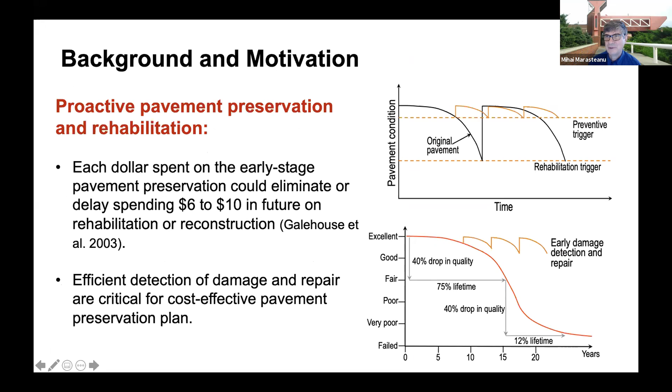And indeed, the background and motivation is very straightforward. Everybody knows about proactive pavement preservation and rehabilitation versus reactive. This has been a topic that has been discussed for many, many years in the pavement community. And basically, it boils down to the fact that if you can actually manage to keep the pavement in a reasonable condition, starting with the early stages of pavement preservation, then we can eliminate very costly repairs that are needed if the pavement is not preserved in time, so to speak.

So these numbers have been around for a long time. A lot of people are talking about pavement preservation, but in terms of practical applications, although there is a lot of work, it's fair to say not enough has been done. And an efficient detection of damage. So when we talk about early stage, what does that mean? Early detection of damage is not always possible. That is a critical component, and a timely repair also is a critical component of a cost-effective pavement preservation

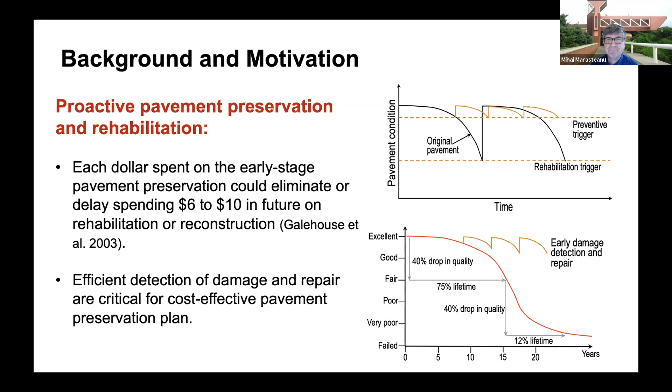And our focus was, as we mentioned, on early detection, to find out when we start to see, for example, microcracks occurring and other types of damage. We show here a number of pictures from various non-destructive test methods that have been used. Of course, we are all familiar with destructive test methods that could be more accurate, but, as we well know, result in a bunch of round holes in your pavement when we take cores.

But I would say for the past 20 years, there has been a lot of work in non-destructive testing. There are more and more technologies available, computational capabilities. We are showing here some of them. And I have to acknowledge that some of the methods shown here, for example, MIRA, and in particular the rolling density meter, came out of research and sponsorship from Minnesota Department of Transportation, which has been a champion in promoting some of these non-destructive test methods.

Of course, there are other methods, digital image correlation, and the ultrasonic test, in various forms that have been used. But as you will see in this investigation, we were trying to take advantage of some unique properties of the new materials to be able to detect this early damage.

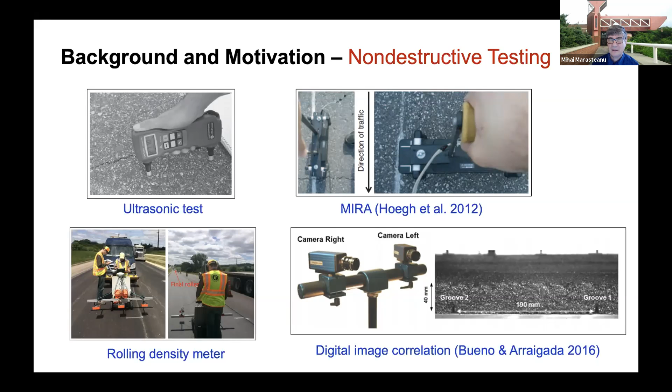Okay, so Jialiang, if you would like to continue, thank you.

Thank you, Mihai. So as Mihai said, over the years different NDT methods were developed. In this research, we take a different route. We were thinking whether or not we can use the pavement itself as a material to detect damage. In the literature, some people call it self-sensing. The material we have investigated for a while is called GNP-modified asphalt materials, and GNP stands for graphite nanoplatelet. So I just want to give you a brief description of what this material is.

So GNP, basically, is like a disc. The disc consists of several layers of carbon atoms, which we call graphene. The disc has a thickness of about submicrons, and the diameter of the disc is about several microns. So it's really small. When we receive the materials, it's basically like a powder. Starting about 2015 or 2016, the team at the U of M has tried to develop this GNP-modified asphalt material, and we looked at different properties of the material, mostly mechanical properties.

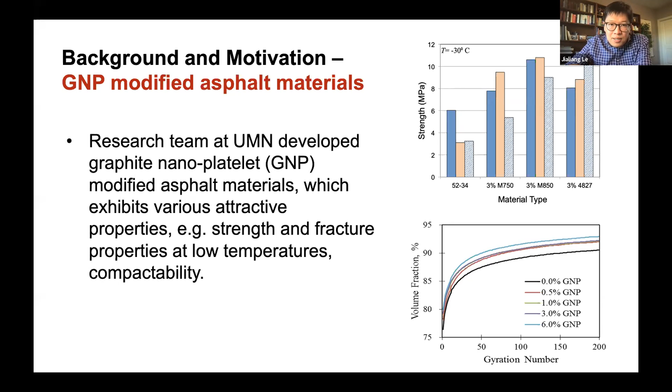Now, we also observe that during the previous research, we see that the GNP material is also highly microwave absorbing and also conductive. So if you do not add the GNP, you may imagine that the asphalt material does not conduct electricity, but after adding GNP, it does.

At the same time, if we put a GNP asphalt into the microwave, you will see what happens. I hope the video will play here. So you can see now something happened. So what you see is that we put a small amount of GNP asphalt in the microwave, and through microwave energy, actually it can generate a lot of heat. And that really stimulates the idea to see whether we can use that to do damage healing.

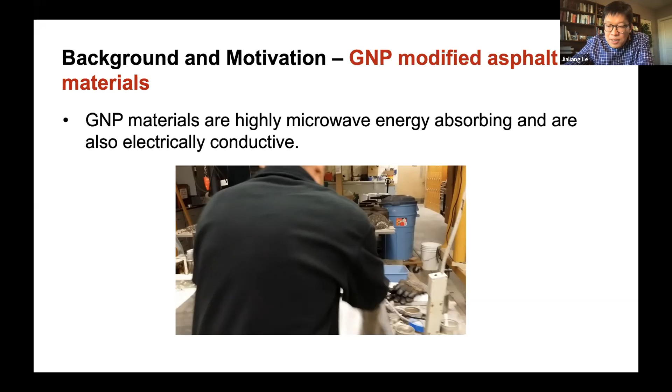Okay, so that is a very brief background of the GNP material developed at the U of M. And now I want to hand over to Larry to talk about the other part of the material with the Taconite Concentrate. Larry, please.

Sure, thank you. Yeah, and thanks everybody for being here today. I want to thank Jialiang and Mihai for having me along on this project.

It's been very interesting. Really, the background and motivation: Jialiang has just talked about GNP, and so has Mihai. A lot of research that we've done over the years. I have to give credit. I know that Dave Hopstock is in the audience today, and also Kyle Hoegh, who are both collaborators on this project.

David brought to my attention several years ago how magnetite is an excellent microwave absorber, and we have a lot of magnetite in the taconite ore that's mined here in Minnesota, and a lot of byproducts that are generated that I've talked about over the years as being a very good aggregate material. This property is inherently enhanced with magnetite, so it makes it a natural choice to use in a pavement application like this.

So this is just a very quick example of what that effect is, comparing limestone, sand, quartz, which is basically transparent to microwave energy, versus the three taconite materials on the right, going from left to right with increasing magnetite content. So you can see just over a period of 30 seconds, the difference between each one. So there is a definite heating enhancement with using taconite materials that contain magnetite in asphalt formulation. So next slide, please.

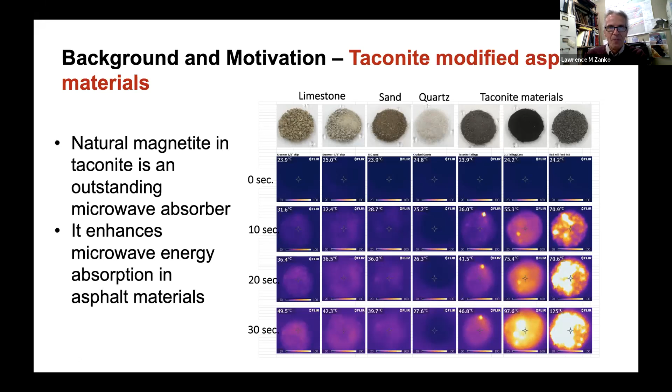And just taking that a bit further, we received cubes that were made at the University of Minnesota Twin Cities campus that contained a control binder, taconite concentrate only, and GNP plus taconite concentrate binder. So again, these are some experiments that were done with a 1 kilowatt customized microwave heating device that we use, and then some thermal imaging to give you an idea of what was happening.

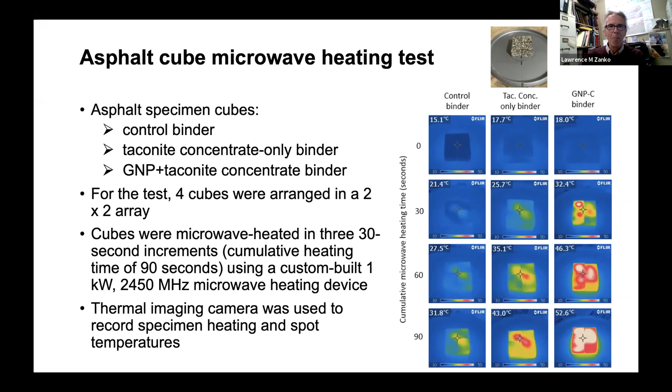Again, the control binder in the left-hand column, just binder as is, taconite concentrate only in the middle, and then the two together. And this is something that we saw during this project and other experiments, that there seemed to be a synergistic relationship between having GNP and the taconite concentrate together in a mix. So that again is more of the rationale for the project, using these two in combination for ultimately rehealing or enhancing the strength and long-term durability of asphalt pavements. So I think that might be it for my part right now. Yep.

Yes, so I want to just summarize the objective of this research. This research really looks at 4 aspects of this new material and tries to explore its capability for 2 things. One is damage detection, one is damage healing, which very much align with the ultimate goal of earlier detection of damage and pavement preservation. So we will talk about damage detection through the measurement of electric conductivity.

And then we want to talk about whether or not the GNP-taconite-modified asphalt materials will indeed improve the conductivity. And then we will talk about the damage healing capability of this new material through microwave heating. And then we will present some application of this new material for tack coat.

So the first topic I want to talk about is damage detection using electric conductivity. This part is theoretical modeling. Basically, we are asking ourselves: if we have an electrically conductive material and a crack forms in the material, are we able to quantify the extent of the crack through the measurement of conductivity?

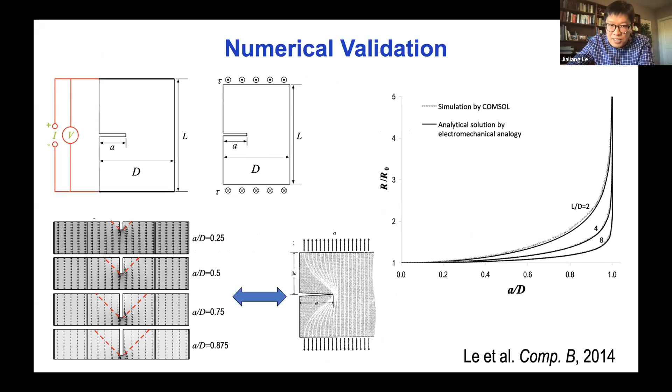So it shows that this model really works very well, provided the material is conductive. So theoretically speaking, if we have a conductive material, we are able to determine the crack size precisely from the measured change of the resistance. So the next question is whether we are able to make a conductive material. That leads to the second part of the talk, which will be focused on the electrical conductivity of GNP-taconite-modified asphalt materials. So now we want to see whether, if we add GNP and taconite into the asphalt, we can make it conductive.

The GNP material we investigate in this project is from Asbury Carbon, a company in New Jersey. They provide us two types of GNP material. One is called M850, which is a graphite flake. Carbon content is 99.54%. Surface area is 13 meters squared per gram. The other one is 4827. This is what they call a kinetic graphene material. It has a higher carbon content, 99.66%. Surface area is much larger; we are looking at 250 meters squared per gram.

The reason that the company provides us with these two materials is cost. The company is aware of the potential application of large quantities for infrastructure, so it's important to keep the cost low. As you can see, the cost of these two materials is pretty low. We are looking at $3 to $4 per pound. Just to give you a brief idea, if you purchase single-walled carbon nanotubes, we are looking at $20 to $50 per gram. So it's much more expensive. So we try to use a cheap material that can serve the purpose.

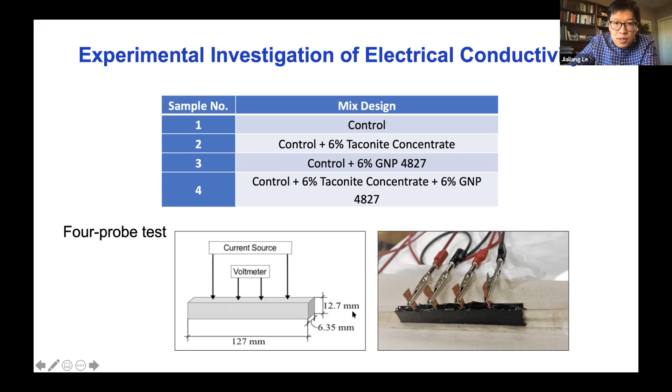And on the right-hand side, you see the specimen. So the outer 2 outlets are for the applied current, and on the inner ones, we measure the voltage. And there's the specimen dimension. Okay, so quickly, that is the result we measured. We measure conductivity.

And on the other hand, if you just put the GNP or taconite by itself, it does not lead to much increase in conductivity. So we speculate what's the reason behind this. It's not fully understood yet, but our speculation is that, for example, if we put GNP in the binder, how can we make the binder conductive? So GNP itself is electroconductive, okay?

Now you put those small particles and disperse them in the binder medium. So you want those particles to be as close to each other as possible, so the electrons can hop between them. And to do that, you want to create almost a uniform network of GNP. That is extremely difficult to achieve in experiment, because the binder is viscous, so it's very hard to uniformly disperse GNP in the binder, even though we use a high shear mixer. We still cannot really achieve the optimum uniform network of GNP.

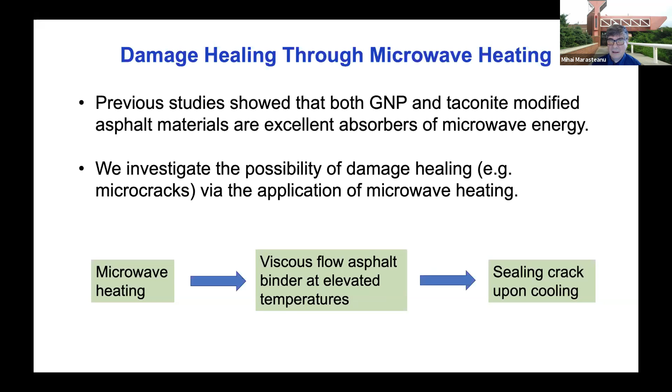And there were a number of studies in the literature that showed the potential of healing. I remember 10 years ago, Delft University was using steel fibers. They had a beam, they cracked it, they put it in the microwave, and then they retested it, and it showed that the beam could still take some loading. So it was more of an empirical approach, but we wanted to follow a more rigorous approach based on fracture mechanics concepts.

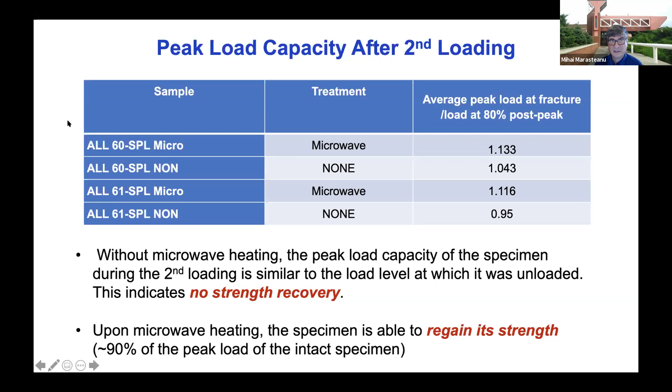And you can see from these values that without microwave heating, the peak load capacity of the specimen during the second loading is similar to the load level at which it was unloaded, which indicates no strength recovery. So obviously, this is where damage occurred. However, upon microwave heating, the specimen was able to regain its strength, approximately 90%, a little bit more, of the peak load of the intact specimen. So clearly a significant difference. And I think this is more obvious in the second slide.

And I have to mention that from what we have seen in the literature, this is the first rigorous test based on mechanics concepts that shows that healing actually occurs physically in a specimen in the lab.

So, all right. So I think now Larry will discuss the various microwave systems. He's the expert. I mean, Vern is the expert, but Larry will do some presentation now. So thank you, Larry. Okay, thanks, Mihai. Yeah, Vern is definitely the expert, and Dave is as well.

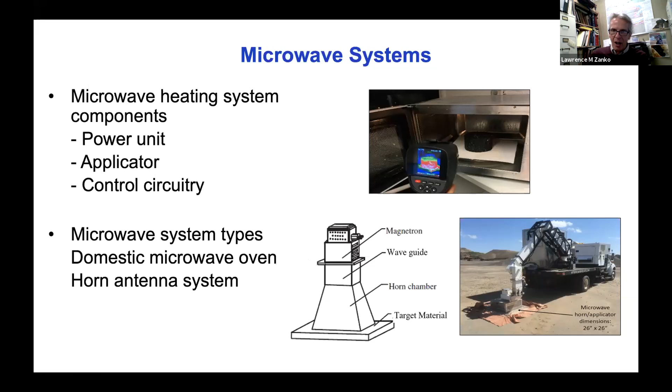And the piece of equipment on the lower right is something that we did a field test on a couple of years ago at Tiller Corporation down in the Twin Cities. Kyle Hoegh provided the equipment. I believe we were using a 50 kW generator and did some tests. So next slide, please.

Yeah, the idea here, Tiller had an area where they generate a lot of aggregate. They had 3 different pavement types that we could test. One was granite, one was a limestone asphalt mix, and another that was Mesabi aggregate, or basically crushed taconite waste rock, which they put down in an adjacent portion of this area. So we were able to test all 3. So next slide, please.

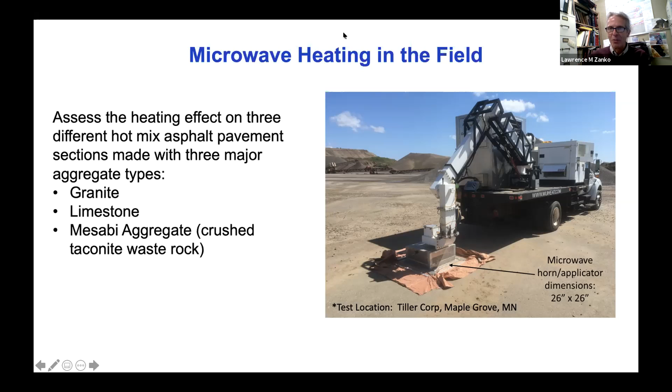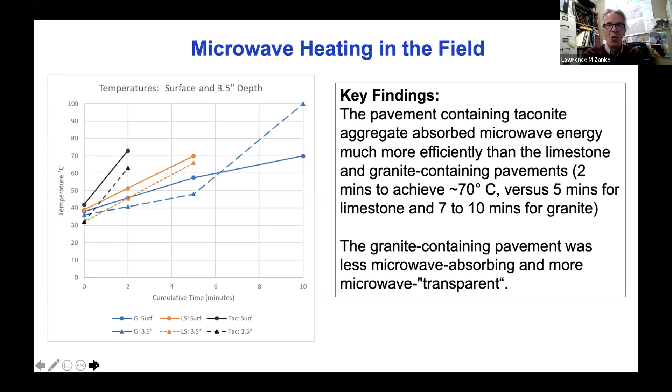Okay, so the last part is about how we apply this material to tack coat. Larry, want to continue? Next slide. Oh, yeah, that's me. Sorry. Next slide, please.

The whole idea was to investigate the interfacial bond strength of the GNP-taconite-modified tack coat after subjecting it to microwave heating. I'll talk about the experiments we did to prepare those samples for that testing. Two 6-inch diameter specimens were sandwiched together with a tack coat in between. What we did here at NRRI was take temperature measurements midway at the interface between the tack coat and the two lifts of asphalt, and then a lower reading of temperature after being subjected to microwave energy. Next slide, please.

So again, we were provided with a normal tack coat and then the GNP-taconite-modified mixture. Both of them were subjected to microwave energy, and those specimens that were heated were then subjected to the shear strength test. You can see the photo images on the right: the microwave unit, the custom-built one that was provided by Kyle Hoegh for doing these tests. The specimens were placed underneath.

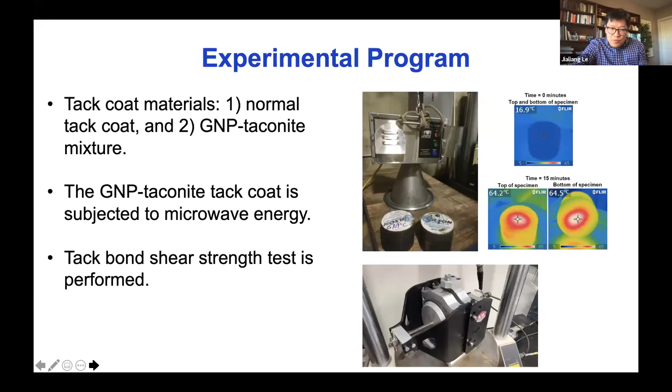Okay, so that leads to our conclusion of this project. To summarize, we tried to explore the capability of damage sensing and damage healing, these two aspects of this new material, GNP-taconite-modified asphalt binder and mixtures. The reason is that in previous research supported by MnDOT, we already showed different promising features of this material. So in this study, we tried to further investigate what else we can do with it. We find that this new material exhibits a significant improvement in electrical conductivity, and we believe the mechanism behind this improvement is the enhanced electron-hopping mechanism.

We also find that the humidity of the testing environment is critical and has a strong influence on the measured conductivity. So when we move to the field test, it's important to control humidity. Based on the fact that the electrostatic field is mathematically analogous to the anti-plane shear loading, we are able to derive a theoretical relationship between the conductivity and the damage extent. And we show that the GNP-taconite-modified asphalt mixtures can effectively absorb microwave energy, which provides an effective means for damage healing. This attractive property can also be exploited to improve the interfacial bonding for tack coat.

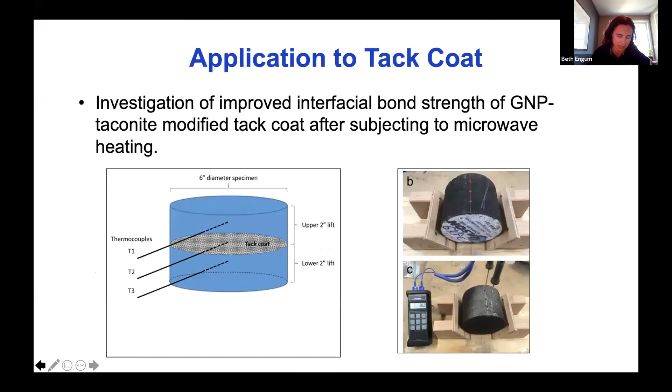So I don't see any questions yet, but I will ask one of my own, and this would probably be for Jialiang. I know you talked about the difficulties of mixing in the GNP, and that 6% is really the max, and that you found that adding taconite helped get the mixture mixed more uniformly. Did you try adding more than 1% taconite? Would that allow you potentially to get more than 6% of the GNP distributed? Good question. I don't think we tried anything more than 1% of taconite. We haven't tried that.

And then one more question, which may be for Mihai. I noticed on the testing you did for the microwave healing, is it correct that you used a 1% taconite mixture for that test? Yes, that is correct. We used 6% and 1% concentrate. Would you be thinking at all about doing the same test with a higher taconite percentage?

Yes, there is one aspect that we have not discussed, because taconite concentrate is a very fine aggregate that could be interpreted also as filler, which then changes the properties of the mixture a little bit. So there are some limitations on how much filler you can add. The binder content then needs to be changed. So we try to limit the use of taconite concentrate from that point of view.

But that's an interesting idea, so maybe we should try that. It is possible that if we add more, the mix will become more brittle at low temperatures, but it's just speculation. We looked at the filler content in typical mixtures, so that's why we limited the percent of concentrate used.

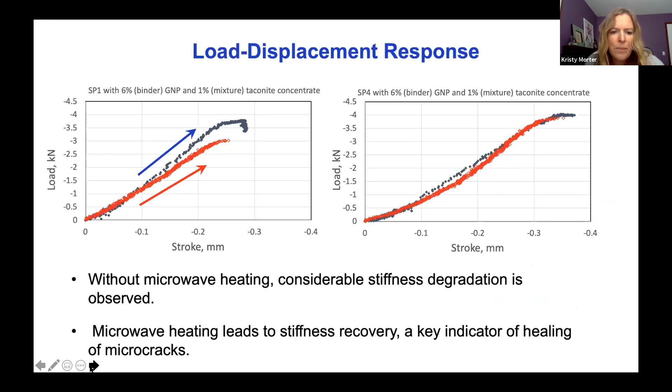I can address that, or Jialiang, if you want to discuss it. No, you can do it.

So this is a comparison of the regular tack coat and the one that has the GNP-taconite material. And after microwaving, basically we perform this interface strength testing. It was more a proof of concept, because this bond strength test, actually there are many variations of that. And my colleague from Louisiana State, Louay Mohammad, did a lot of work on tack coat, very nice work, but we are just trying to show differences.

And it appears from this limited testing that there is some minimal enhancement of the bond strength between the asphalt layers, which maybe in the field could be significant in increasing performance, limiting delamination and longitudinal cracks and so on. So we see some improvement compared to the regular tack coat. But this was very limited, more proof of concept, as I mentioned. So. Okay.